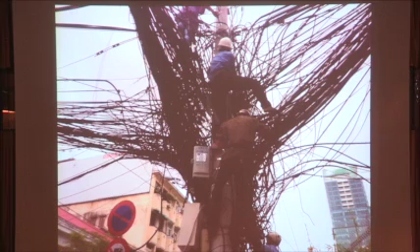It was the rail and infrastructure that opened up the West. California, if anything, is a state that really depends on its infrastructure as a means to exploring new territories. And today, infrastructure is different. It's much more complex. Technology has taken infrastructure in new directions that we have yet to resolve within the confines and platforms within which we work.

And Los Angeles, there's downtown over there, shown in the previous slide with the red circle. As you can see today, Los Angeles has no semblance of what it used to be. The Los Angeles Basin actually used to be the watershed of the Los Angeles River, but today it's completely inundated by development and mostly gray.

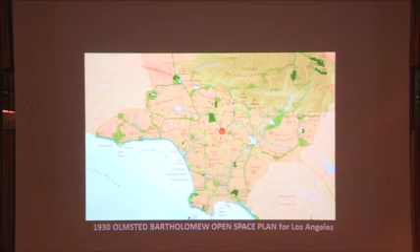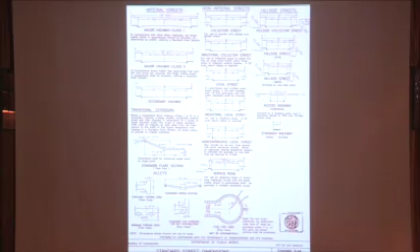Similarly, on the streets, we're seeing these very overscale wide streets. Most of the time, they're sort of empty. How do you address this situation that's permeating throughout our entire urban fabric? The city has only 13 street sections to work with, and we have a city of over 10 million people, so how does this happen? We're interested in figuring this out.

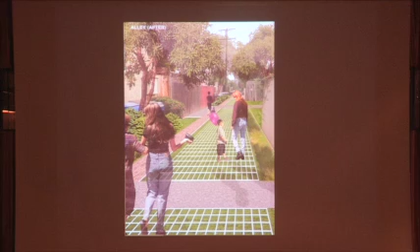It's like, why are we dealing with this situation? And then we get these alleyways, too big, nobody uses them, and people started to think, well, maybe there are alternatives to making these leftover residual spaces more about people, about habitat and ecology.

And then, of course, you all know LA is Hollywood in many respects. Our city, a lot of these places are great places for filming, and interestingly, it takes people at a local level, individuals, artists, to figure out an alternative function for a channelized waterway like this one.

This is right in front of our office, where our sidewalks are not just for people, but sometimes become completely occupied by the filming industry. So it's actually a very dynamic sidewalk, full of spontaneity and unpredictability.

And of course, city of mobility - what do you do with your hardware store, your iron shop? Why not put it in a truck and drive it around so you could start fixing people's needs as you go? This legacy of the Kogi truck has created such a following on Twitter that many cities have followed suit.

Recently we counted more than 300 gourmet food trucks all over the city, and it's becoming such a phenomenon. It tells you that perhaps our lifestyle doesn't remain the way it is - things shift, new things happen, people come up with new ideas.

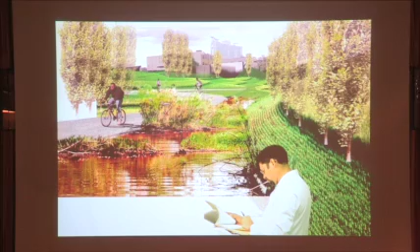In terms of research, Charles mentioned a little bit earlier about the infrastructure research initiative, and really it's because we're inundated by all these things that happen in the city, and we want to be able to make clear and categorize and understand why things happen. So this sort of side job occurred where we looked at infrastructure as one component of the urban fabric and tried to understand what's its innate DNA, and whether there's opportunity for hybridizing, repurposing, repositioning the infrastructure, and hopefully making the city we live in a little bit better to live.

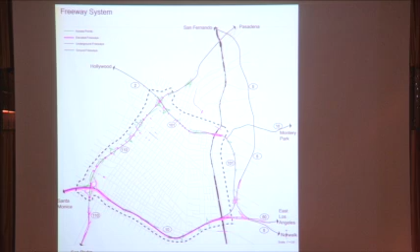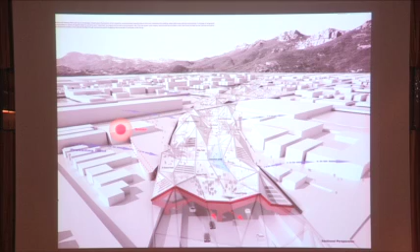So what about options of capping the freeways? Currently, in the city, there are at least five freeway cap parks being proposed both by the city and nonprofit organizations, and this is one of the studio exercises trying to understand what it means to cap a freeway and how economically it might help to invigorate the city, and how new programs could be superimposed and added to the freeway itself.

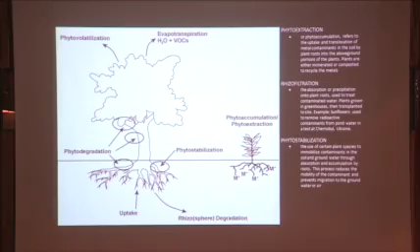We also looked at phytoremediation because our sites are rail yards, oil fields, ports. How do you deal with that sort of land that's no longer reusable for a healthy environment? And we are left with no choice but to really push the envelope.

The typology of corridors that we have, streets—how can we re-look at streets so that they function at a different level, as for ecology and for pedestrians, social conditions as well.

And all of this is because we are living with an antiquated infrastructural system created after World War II, an example of that being our pipe system. This, a couple years ago, burst, creating a sinkhole. So this poor fire truck just sort of buried itself in there. And to this day, nobody really knew what happened or what's the cause of it, because there wasn't any data and recording showing where these pipes are located.

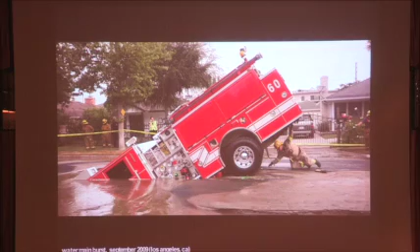So we're sort of in a panic these days as far as anything that happens with our city. I'm sure this is not the only example that happens in LA. I'm sure other cities have similar situations.

And so recently we looked at our work and we're thinking, well, a lot of these issues are actually sort of embedded in our projects, and how can we really look at our projects critically from an academic and research point of view and try to understand what it is that we've been doing all this time.

So we sort of came up with a definition—I'm sure this is one of many possibilities—that landscape infrastructure is a methodology that expands the typical parameters of a designed landscape to a multifunctional, high-performance system, including those systems originally ascribed to traditional infrastructure.

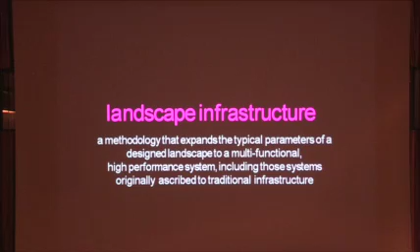So within this book, there are issues of performance, perhaps through ecological corridors—in this case, Buffalo Bayou—that by understanding how it performs ecologically, as well as a storm retention system, river corridor, we might be able to understand the project beyond what it looks like.

So Gerdo will continue with the case studies.

Having lived in the Bay Area and having been to grad school here, it's a unique kind of landscape. Moving to Los Angeles is like a frontier.

Is anybody from Los Angeles here? All right, you got a couple, good. Go LA.

LA is a unique place. So when Ying-Yu and I landed there, it was all about how should we try to understand this city so that it can affect how we work.

One of the first projects we got was this crazy project in Koreatown, which is one of the densest areas of Los Angeles at about 14,000 people per square mile. It was a crazy developer, crazy project. This was happening when times were good, about 4 years ago.

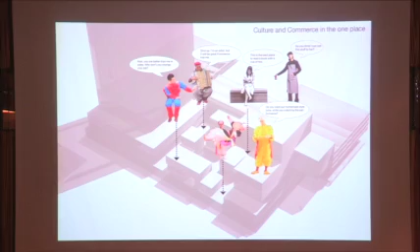And they wanted everything, so what is everything? Well, everything in Los Angeles is really the people, the kind of cultural diversity that happens within a city. These blocks represent the massing study that was done initially, and our cartoons suggest that we need to incorporate the various cultures within our projects in order to understand what they could be.

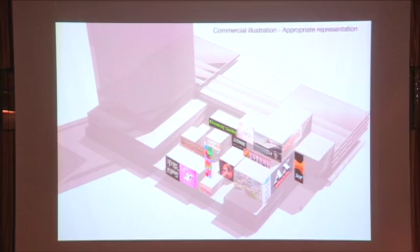We also understand that LA is kind of a crazy media city. We love media, we love to explore and investigate different kinds of media, so this represents that potential. And LA is all about experimentation, that green roofs are more than green roofs, that they could be used for recreation, lifestyle, photovoltaic, etc. This mosaic image symbolizes that potential.

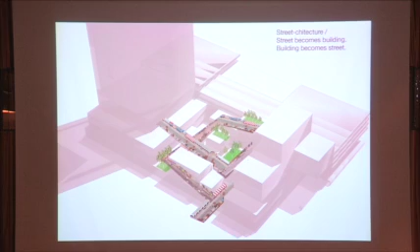And then finally, we've asked ourselves, well, what about the street? We're very interested in infrastructure, and what is the DNA of the street, as Ying-Yu put it. Can we carry that successfully into the building and into the spaces between the buildings to create the kind of identity for open space?

And so with that, we started to investigate further, and we started to look at projects beyond LA as a way of keeping the balance in check.

This is a project with the Shanghai Planning Bureau called Chongming Island. This project is all about understanding how sediment is deposited in one of the most pristine or most important estuaries in the world. It's an important area for Shanghai, at the mouth of the Yangtze River. You can kind of see that in that diagram.

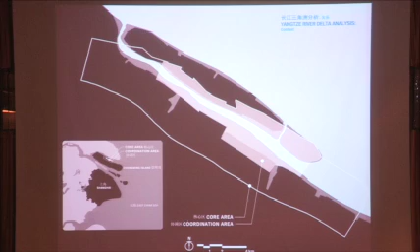These series of diagrams try to explore how water is moving through that mouth and what the mechanisms are that structure water, i.e. levee systems.

We mapped all of these areas, and this sequence shows how the shoreline developed over time through sediment. It became a natural system, but as Shanghai grew, the need to give structure to these islands became paramount. So the competition was about: if sedimentation is part of the issue, how can we incorporate sedimentation into a kind of future for expansion of the Shanghai population?

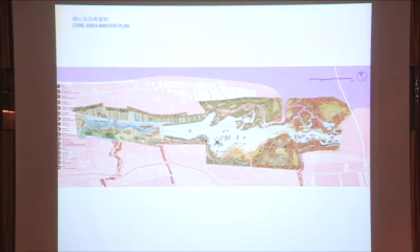That's a quick master plan, not as important as the process of argument. We didn't win this project, by the way, mainly because we felt there was a need to explore a certain kind of logic that is possible with government.

Governments are difficult, but if you can give a good argument and establish some kind of logic, we thought we had a chance. So this was our logic: essentially there are farmlands in the area now, and we were arguing for wetlands as a way to incorporate the sedimentation of the Yangtze River and create new land that could be used for parks and recreation and a new infrastructure for new development.

So what you're looking at here is essentially: the diamond has value, and it's easy to understand that. Water is a resource, it has value, really easy to understand. But how do you put a price tag on wetlands? How do you structure the economic value of that?

We looked at diminishing marginal utility with this little diagram off to the left in terms of food production and the value of food relative to what culture or country or economic status resides in whatever food production is available.

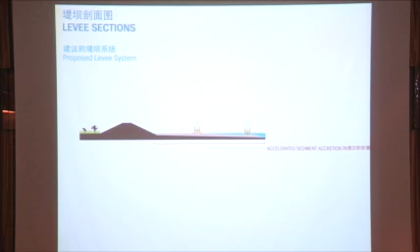With that kind of logic, we started to explore how sedimentation actually accumulates. How is this new land created? Through a series of modeling, which I don't have here today, and through a structure of natural systems and bamboo systems that structure sediment as it moves through the system, a kind of ecological culture evolves from the sedimentation of sand over hundreds of years.

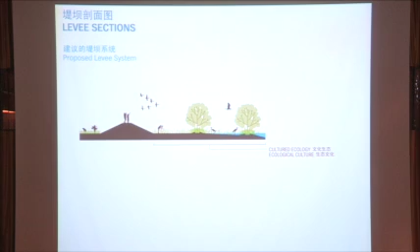So maybe that's why we didn't win, because it wasn't the 5-year fix, it was the 100-year, 150-year fix, which if you're talking about sustainability, sometimes that's a scale you have to think about. But we also investigated the different species of wildlife and fish and birds that might occupy these new ecologies, and structured ways in which we can look at renewable energy across 100 square miles of land.

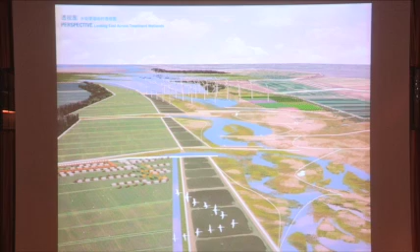MAC is a competition in Korea. Seoul, Korea is 23 million, probably changing as we speak. But as one of the top urban areas in terms of population in the world, this became an interesting project for us in that we asked ourselves the question: if these cities are maximizing their footprint ecologically and in terms of carrying capacity, then is it right for these cities to grow in an unstructured way? How can you give structure to that kind of growth? The proposal here looks at 500,000 people for an area just south of Seoul.

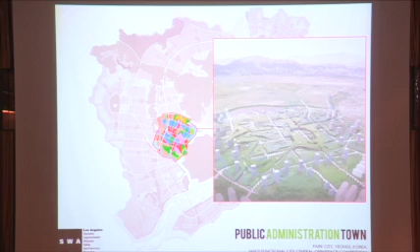Balmori won the competition for the master plan of the core area. I'm not sure where it is currently, but this project was about the land adjacent to it. It was about 100 square kilometers of land, you can see in the photo above. And as a competition, it's all about trying to establish an idea.

This shows you quickly the context of it. For many reasons, there's nothing really unique about the site. It's currently used for agriculture, you can see the pattern, and the topographical challenges around it. So it makes sense that it becomes this open space. It's easy. And so we tried to bring some logic into it.

We looked at precedents - how has parks evolved? We all know, especially with Charles here and the other faculty, that ecological processes are paramount now in these large-scale tracts of land, that they simply have to be multifunctional for the kind of ecological systems that are being proposed. These are just a quick way to talk about that.

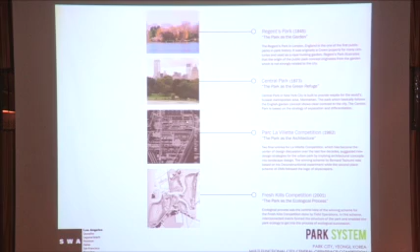But then, how do you establish the grid? Urban design is many things to many people, but to a site that doesn't have very strong characteristics other than farmlands, we felt that the grid system needed to be established as a kind of flexible framework for how this city could grow. Based on this study, we determined that this project might have a 100-meter by 200-meter block size - a little larger than Los Angeles, certainly larger than New York, but not as large as Beijing or Seoul.

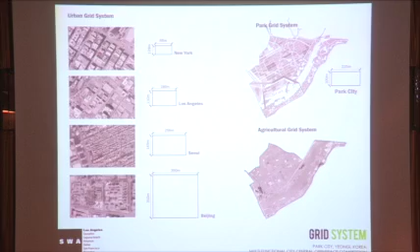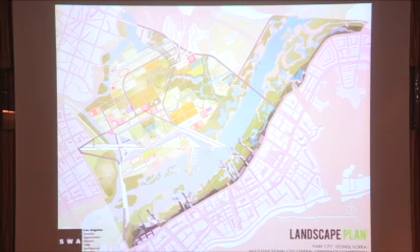And so what we created then was this flexible framework that, again, isn't about solving the project in a year or 5 years. It was about 100 years, and that 500,000 people will need time to adapt to a place that is quite foreign.

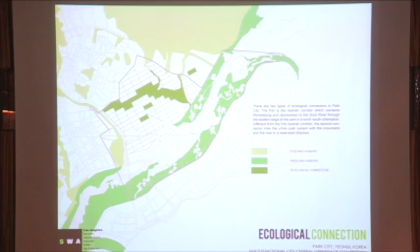These diagrams are very typical of the kind of work that's done at this scale. You have to map and quantify and inventory the natural systems that are critical to how an area could evolve with 500,000 people. We started to look at potential for topography to be incorporated into the project and different characteristics, and certainly the hydrology of the land and maintaining the capacity of the flood zone while incorporating new programs for recreation and open space.

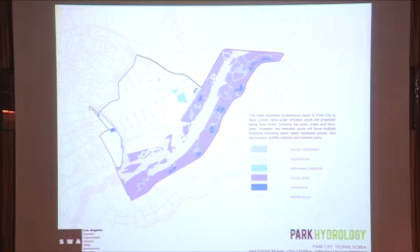This diagram starts to turn the corner a little bit. It starts to take everything that we talked about previously and put it into something that is quite tangible. What you see here is basically a map that shows different areas of exploration for open space programming. It'll be a little more clear with this system.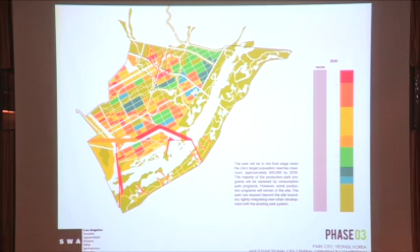I think the one thing we're most interested in is trying to create landscapes and programming that are relevant to that particular time. Sometimes master plans, just by what they do, aren't flexible enough.

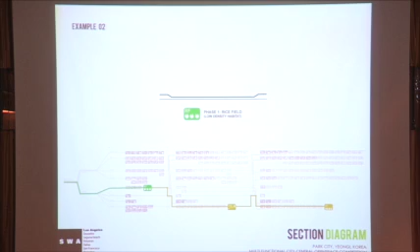This is a quick diagram charting 30 or 40 years of a particular kind of landscape. The little diagram at the top shows a rice field, but in a few years, depending on soil conditions and water, it could transform into an open meadow through sedimentation. If the sedimentation continues and is left unstructured and unkept in a natural state, it could become a forest, which can then have more habitat value and create a new structure for open space based on time—not the 5-year or 1-year fix.

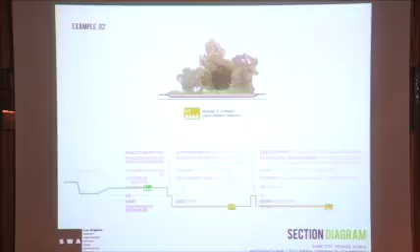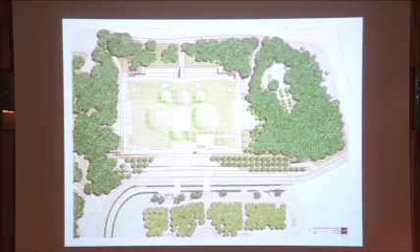California Academy of Sciences—many of you probably already know, and we probably shouldn't even talk about this project that much, but we're using it as a setup to another green roof project we recently completed in Shanghai. This is in Golden Gate Park in San Francisco, the existing building, with Renzo Piano as architect. The idea was to restore and renovate the project by incorporating a really large 10-acre green roof on top, kind of a hat, but a high-performance hat.

These mounds are both reminiscent of the hills of San Francisco, but also meant to incorporate interior programs for different uses within the building, as well as having penetrations through the roof for ventilation, heating, and cooling, and then a little platform at the top for educational interpretive uses.

This is one of the projects we profiled in our book. We took all the technology that went into it, which at the time it was built—maybe 4 years ago now—was pretty much state-of-the-art green roof, probably even more state-of-the-art now. But we were dealing with steep slopes, issues of aspect, native plants that had to perform, the need for irrigation, and a lot of pressure to create a landscape that performed.

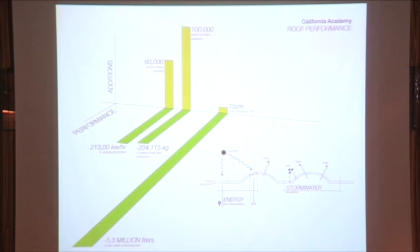This diagram shows the inputs on top in that light yellow color, and then the output in darker green color to the bottom left, in terms of what the inputs are and what we get out of it in terms of performance. A lot of it was photovoltaic, and of course 100,000 plants were installed on this 15-centimeter thick living roof. The process of building this green roof was a very unique experience.

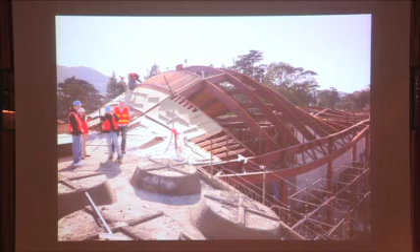It was basically a mock-up of a new roof every day. The folks at SWA who worked on this, John Loomis and Larry Reed, worked extremely hard and collaboratively with engineers and architects to establish a system that was all about, in a way, maintenance. These gabion walls not only held back the soil and roots during the growing season, but also provided a network for maintenance, so folks could get out there and investigate the plants and see how they're doing.

We also worked with plant specialists and ecologists in inventing basically a coir tray—these are coconut fibers that have enough rigidity to hold soil for about 3 or 4 years, and then they deteriorate. Once they deteriorate, they're replaced with root mass. That transitional approach really worked, and because they're stacked against each other, as you can see at the top left, that provides the friction needed to prevent them from sliding down during a big rainstorm.

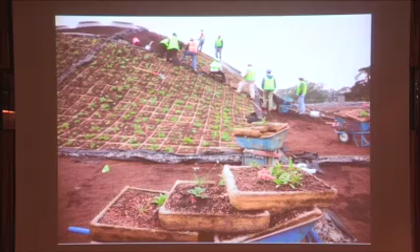During the course of 2 years, they experimented with something like 100 native plants, and we ended up with about 9 plants that performed the way the Academy wanted. It's an amazing green roof—if you've never visited, it's worth a look. It's become one of the big destinations in San Francisco, which is great for green roofs because we feel it does have something to teach.

Butterflies have returned to this part of Golden Gate Park, and they had to create a docent program because so many people were getting up on that roof wanting answers. On any given weekend, there are about 7 of these folks out there with our details and other things, educating the public about green roofs.

It's funny—I went out there one time and a woman said she wanted to put it on her house, and this guy was really nice. He said, okay, well, it's really expensive. And she said, well, but I thought this is the way to go, I thought it's sustainable and it's green. I think it's this kind of docent program that will help transition what you see versus what might happen at the scale of a house, and we're interested in continuing to educate the public about the benefits of green roofs.

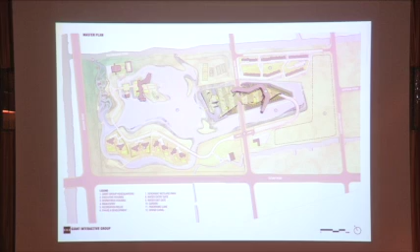We asked him to work with us, and what he ended up doing is one of the most difficult things—he wanted to do this huge green roof. Knowing we had experience with California Academy of Sciences, he wanted to experiment with it there in Shanghai. The project was completed about a year ago, and the green roof was installed over the last year. It has done really well.

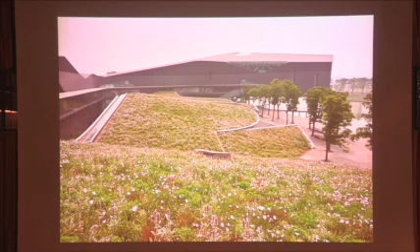In terms of plant materials, we have an assortment of sedums as well as some seasonal plant materials. A lot of the roof itself is actually bigger than the Academy of Sciences, and in some places it's more than a 1-to-1 slope.

This is in China, and the way construction works there is very different than the United States—much more disorganized, and a lot of times you're put in a crisis mode trying to figure out what to do next. This is an example of how we dealt with this really steep roof: we inserted stumps or feet into the slope so the gabion cages we used for the Academy could be laid across, using these stumps as props to hold them vertically.

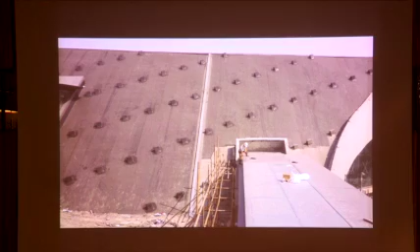On top of that, we sprayed a hydroseeding material usually used for highway erosion control. The contractor wouldn't disclose the secret recipe he was using, so we didn't really have anything to offer in that regard, although I did try to look around and see what I could find. But anyway, this is what it looks like today.

It's very low maintenance because the plants just grow and kind of take over. Morphosis designed a campus that consists of different parts—workers' offices and workstations above, and on the first floor there's a cafeteria, a gym, even a pool for the workers, with corridors that cut through the roof, in an effort to integrate the interior with the exterior.

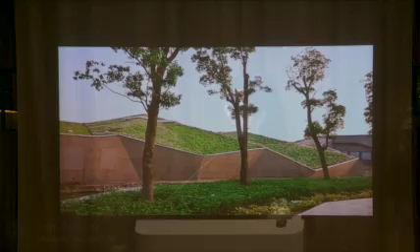The field part is another story I'll save for another day. It's actually pretty difficult to oversee a project of this size and complexity. With this green roof, we hope it's a good lesson, and that perhaps we could come up with new ways of doing it in the future.

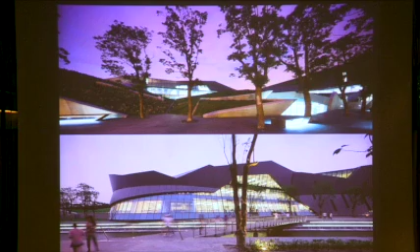Okay, so Milton. Yeah.

Back to Los Angeles—we're currently working with the Mountains Recreation Conservation Authority and the City of Los Angeles trying to figure out what to do with the banks of Ballona Creek and the LA River. I think Mia Lehrer was here about a year ago with the LA River studio. We're working on Ballona Creek, which is west of the LA River but still a large watershed.

The whole goal from the MRCA and the city of LA is to experiment a little, work within a certain budget, provide something for the community that they want, but also have something the city can brag about—meaning they can go to a conference and say they have this state-of-the-art park along the banks of Ballona Creek, which will be a precedent for what they do along both sides of the creek over the next 15 years.

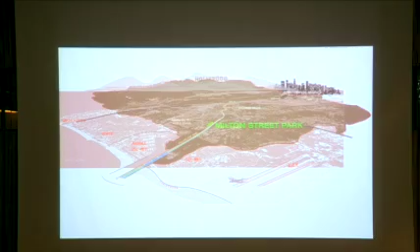So it's a big challenge. This is interesting because that red line represents the 7-mile Ballona Creek Trail, which is an amazing trail. If you've ever ridden your bike there, it's safe, and it goes through Culver City and other parts of the area. But what's more interesting is that everyone uses it as a conduit to get to the beach—it's like a pass-through.

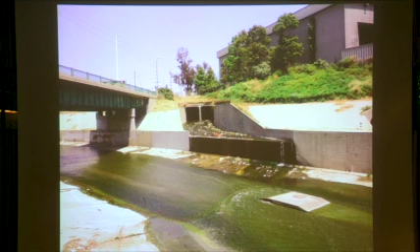Nobody really thinks about the experience between the two points, and therein lies our project. As many of you know, the channelized creeks and rivers in LA are pretty terrible. How do you address these kinds of issues?

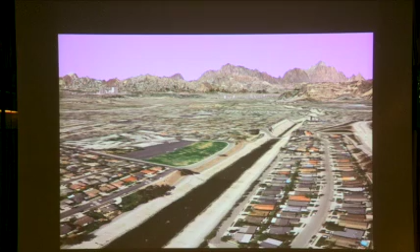That's our site right there, that little sliver is our project. It's a little over an acre, a little over 1,000 feet. This is a middle school, and all of this is single-family detached townhomes, very LA horizontal kind of fabric.

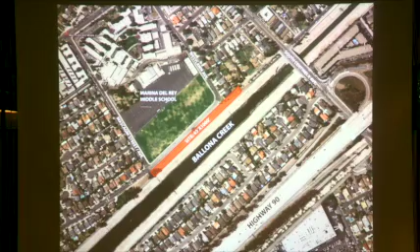This is the one point where you have brackish water, so it's tidal up to this point. From this point forward, it's a dam, and this is all fresh water. With our park along this strip, the brackish water and the need to create a sense of place for this project became really the challenge.

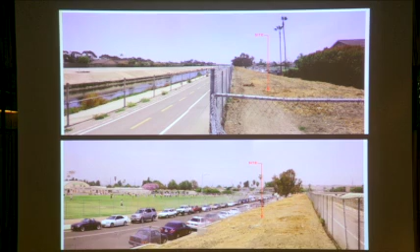It's a pretty standard site, nothing special. Typical levee engineering — all of these soils are probably the spoils of Ballona Creek when it was excavated and built by the Army Corps of Engineers, so the soils are native but highly compacted. There's a kind of community use for the middle school; daytime is different than the weekends, which are kind of pickup games, football, soccer.

Because this is brackish, you're starting to see some real habitat and vegetation being created, and of course the wildlife tends to be attracted to areas that are a little more ecologically diverse. It's not very remarkable.

The outreach process, however, was very remarkable. If you've ever gone through an outreach process in LA, you pretty much can't walk into these meetings with any kind of preconception about what it is. Through the process we went through, we ended up with something quite remarkable, we feel.

What we did essentially is carve up this very thin section into high-performance systems, one being this bike trail. We continue the bike trail, but along the entire 7 miles, this is the only section where it actually moves inland, away from the creek, creating a respite of open space adjacent to the creek. Everywhere else on the 7 miles, you're biking right up against the concrete edge of the creek.

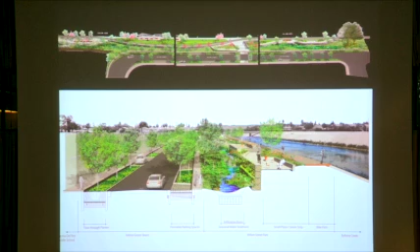Working with Psomas engineers, we created our treatment train for water harvesting. We took all the sub-watersheds within this area and ran them through our park system through active surface and subsurface treatment, as well as working with the city of LA to create the first green street in the city that actively takes on porous paving and pass-through planters within the right-of-way. It's a new thing for the city, and we're working with the city's Green Streets Committee to facilitate that.

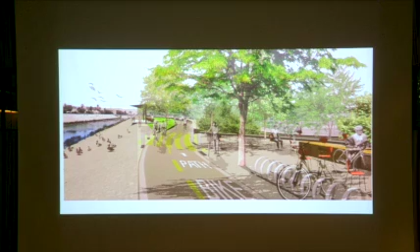The section of it is, again, fairly simple. By moving the bike path off to the land side, we're able to create this open space park. This perspective shows how the bike path starts to move around, creating the respite, an overlook, an area for bicycles, and areas for seating. Programmatically, it's what the community wanted, but in terms of design and process, it has a lot to do with how people will use it and how natural systems might infiltrate it.

Buffalo Bayou is a good project in many ways. This is the work of Kevin Shanley. Looking at the historic bayou — anybody from Texas? One? Really, is that it? Okay, well then maybe you've been to the bayou, right?

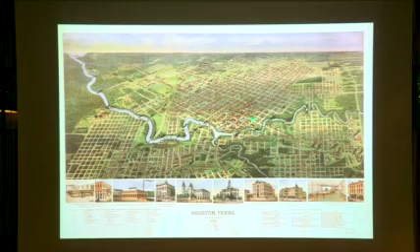The bayou is basically just a languid body of water that moves so slow you can't even see it move, and it basically moves an entire watershed. There's another image here — you can see Galveston Bay, and there's Houston here. This entire area is a watershed, probably 10 times larger than the Los Angeles basin.

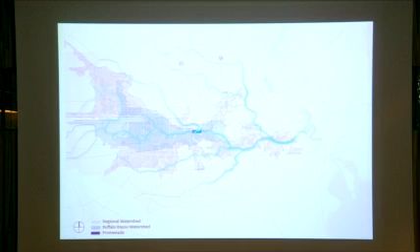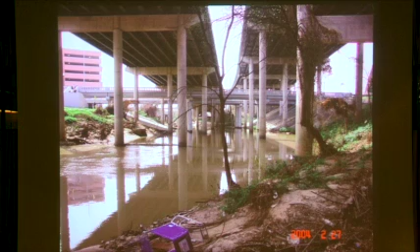The issue here is the city wanted to reconnect with its past. It was a place for recreation, to promenade, a place for the buffalo fish. But you know, it was this — this was the reality. It was a dangerous place.

You wouldn't want to be there in the evening; maybe daytime might be kind of dicey. It was a place for trash. It was really the space underneath freeways that we all know too familiar with.

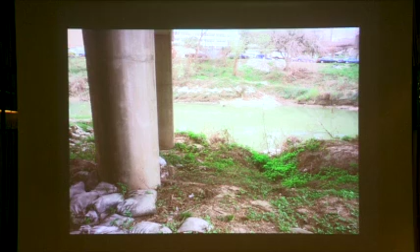It was an area of high erosion. Basically, the water flowed right off the downtown streets and right into the bayou in the downtown section — heavily eroded, weedy, with sedimentary deposits along both sides. And it would flood, flooding the banks frequently. The city was trying to really deal with this reality, and you can see the leftover after the floods.

What we came up with Kevin and his team is a notion that by understanding the infrastructure, which is the river itself, or the bayou, and understanding its context within downtown Houston, we might start to look at a new way in which to incorporate the natural ecosystem of the bayou while incorporating the needs of a new downtown that wants to reinvigorate itself. So a system of thinking went into understanding different aspects of how water moves through a landscape, through a corridor.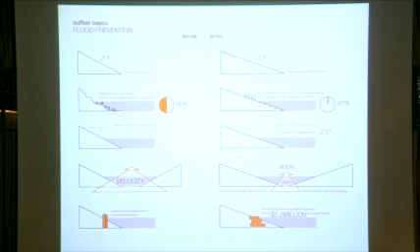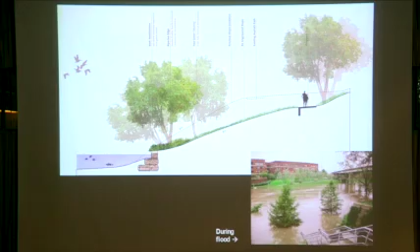So off to the right was the logic that we put into it in order to imagine a different future for the Buffalo Bayou in downtown Houston. Bigger slopes, looking at the horizontal migration of water through sedimentary soils. By making a 3-to-1 slope, you increase the flood elevation capacity, and slowing down the velocity through plant material as well as gabion walls became the approach we used. This section shows the existing slope and the proposed slope that was integrated into the project, and the gabion walls to address this kind of event.

The built project is extraordinary in so many ways. We've heard from different groups, especially the Buffalo Bayou Partnership, that facilitated a lot of the funding and support for the project, that there's been a huge return to the river from the community, from local investment, and also for wildlife.

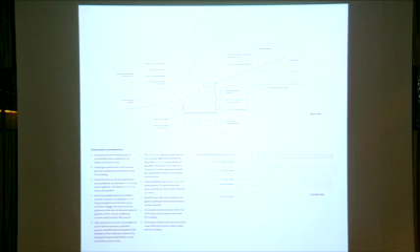These drawings show the engineering that went into creating these gabion wall systems. But more importantly, the research that went into looking at root structure, and that when you have these high capacity, high velocity flood events, if you have shallow rooted plants, it's just going to take everything away. So plants like Ruellia and other plants that are semi-native or native became the structure to control the banks without having to do extensive retaining walls.

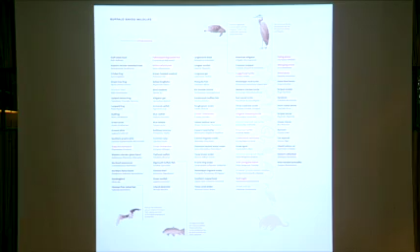The result then was a project that tried to preserve certain kinds of wildlife, endangered wildlife, but also became more of a passive respite for the community, a place to jog, a place to ride your bike, a place to connect from one area to another. It's a hot spot for kayakers who are making their way down the bayou. This is one of many pedestrian bridges being built now to connect the Houston downtown fabric to other areas. It's revitalizing both sides of the bayou.

We worked with a lighting consultant from France who brought in LED to create these amazing illuminated structures underneath the freeway with lighting. In the end, the kind of entangled infrastructure is both poetic in a way, but also a way to give identity back to the city. It's just become an amazing place, super popular, and something that is going to be continued on both the upper reaches of the bayou as well as the lower reaches of the bayou.

I believe this is our last case study. This is Gubei pedestrian promenade, also in Shanghai. The site is really located on the west of the river itself, the Huangpu River. It's more in the suburbs area, the newer expansions of the city. We were asked to come in and really look at this space, this long pedestrian corridor here.

Originally, this was really for cars, but the city decided that they wanted to try something different, and they made this become zoned into this completely pedestrian-oriented corridor. The entire length of this corridor is approximately 700 meters long, with the widest part about 60 meters wide.

So the question about a promenade or a pedestrian circulation system in Shanghai in the modern era prompted us to really look at what it looked like historically. And historically, as a lot of you might know, Shanghai's Lilong areas really consist of very narrow alleyways. Some of them are as wide as 3 feet, barely enough for somebody to walk through without bumping into another person.

And the alleyways were really where life occurs, because these were basically tenement homes back then, very crowded. So activities from the inside spill out to the outside. You can see in the old photos where barber shops were out on the street, as well as vendors, as well as somebody washing dishes and cooking, because there were no infrastructure within these tenement homes.

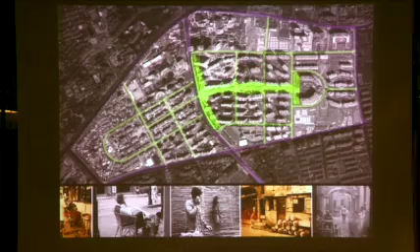So we were interested in that, but at the same time, given the realities of today's modern Shanghai, a lot of these things were considered, but needed to be appropriate for today's needs.

Another issue about Shanghai is its population density. Shanghai is very, very dense compared to LA and London. It's one of the densest places, where there's a general lack of open space, or if there is, it's very hard to get to. The open space in Shanghai is really just 3%, and this is acres per residence. So what we sought to do with this pedestrian promenade is to create as much open space and greenery as possible.

One of the typical situations with dense urban environments is a lack of trees, and it seems kind of an obvious thing to do. Why can't we plant trees in a city to counter all the smog, all the driving, the heat island effect. So one of the goals we set for ourselves very early on was just to plant trees, no matter what happens.

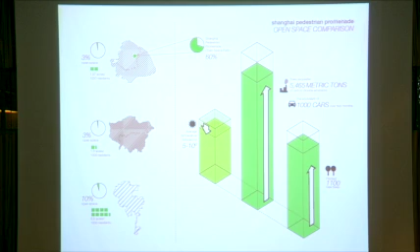So we managed to plant about 1,100 trees. And we were just curious, how much carbon could 1,100 trees sequester? It's actually able to sequester carbon for the amount of 5,465 metric tons, which is equivalent to 1,100 cars over 2 months.

So this is what we had day one. It's paved over, an open slate. What do you do with that kind of space, with buildings over 20 stories tall, 100 meters tall?

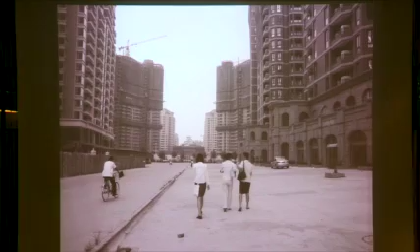Aside from the actual corridor itself, we were also responsible for putting in 2 parks at both ends. A lot of those trees also came from these urban parks.

Originally, the program on the east block consisted mostly of shopping storefronts, so we had lots of outdoor spaces for that use. The central block was the widest space, where lots of community events might happen, and scheduled programmed events and local uses like a post office and grocery stores would happen here.

Just to backtrack a little, this project is actually made of 6 neighborhoods. Within each of these neighborhoods, they have their own gardens. This is the only publicly shared promenade in the entire project, so most people can't really get into these private gardens.

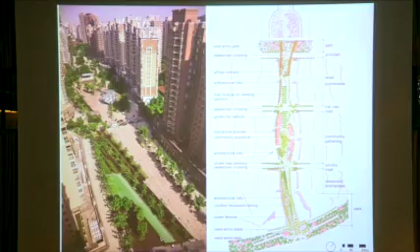So we did try to plant trees, and hopefully over the years, a lot of these zelkovas have started to fill in, and on hot summer days these are actually the most comfortable places to go. We've also tried to install bioswales within this park as a way of cleaning some of the water sheeting off the hard surfaces.

And also fountains. Fountains are actually a challenge in most places because they turn the water off, and if there's no water, you're left with a bathtub. So we didn't want to go that route. We looked for materials that could create interest instead. In this case, these are glass tiles improvised from a different environment, which we took outside and used as part of this fountain design.

It's one of the projects where we tried to experiment with materials, and fortunately we had a client who was very supportive and went along with us in looking for these challenges, and it turned out quite nice.

This is one of the follies that we designed. Originally it was meant to be resting places, but they decided to create some revenue to support the long-term maintenance of this corridor, since it is, after all, a government-owned corridor. So a bakery has come and rented the space, and it has become the central locus of activities here.

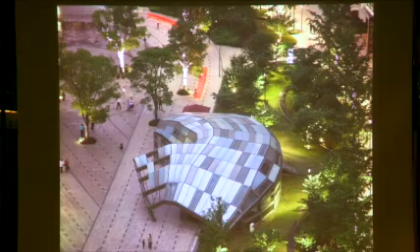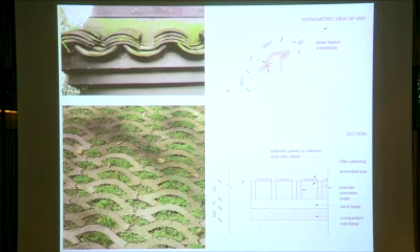We also thought of using traditional architecture elements, such as roof tiles, as inspiration to create these porous pavers, as a way to recall something that happened in the past.

So I think we just wanted to say that as much as we are interested in these larger urban scale issues, at the end of the day, we are also designers, and these materials and details matter greatly in our projects, and we hope they help make these environments better.

To conclude this lecture, we thought we'd leave you with a few remarks and ideas about one of our projects, the Academy. Because it has so much exposure right now, we felt it ripe to criticize.

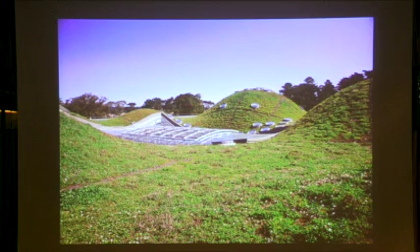Since this lecture is about trying to project alternative futures for projects, we thought we'd begin with this one: maybe 2 years from now, this green roof is still utilizing irrigation water. Our original intent was to cut off the water after the plants established, but because it's so popular with the Academy, they want to keep it green. They don't accept letting the plants go through their natural stage of dying off, becoming brown, and then green again. Because they want it kind of evergreen, we felt maybe there's another future for this green roof.

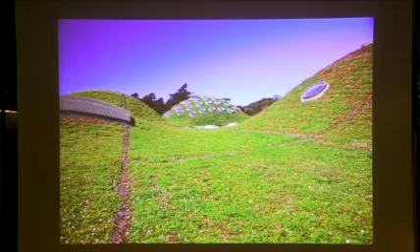Maybe for other green roofs we can start to look at different kinds of programs that could utilize large areas. They could become land banks for different activities that might happen in the future. If land becomes more scarce, perhaps we can farm these green roofs and make them more for the community. Also, maintenance is always the biggest issue with our work as landscape architects: it looks great, but what is the longevity of that landscape? How does it weather? How do you maintain it? The notion that we can operate in this profession thinking about future scenarios is always going to be a good direction for academia and professional practice.